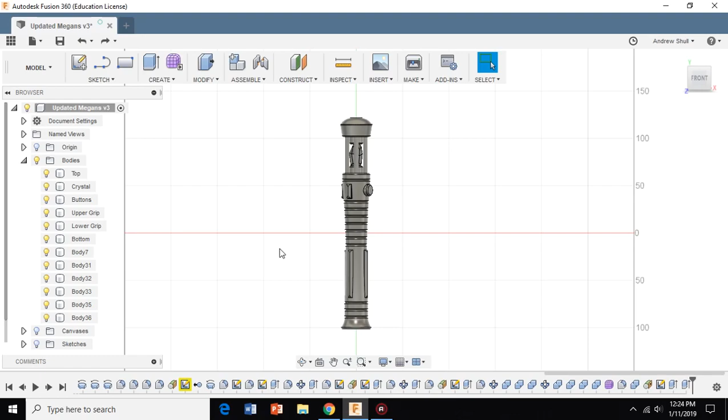Okay guys, so what I want to show you is essentially the final steps towards 3D printing something that you've 3D modeled. This is creating registration parts so that when you 3D print something, for example, I'm working on this lightsaber here.

For those interested, it's a custom lightsaber, just something I drew up out of my imagination, but it's loosely based on a Republic lightsaber just to get the overall silhouette shape, sort of.

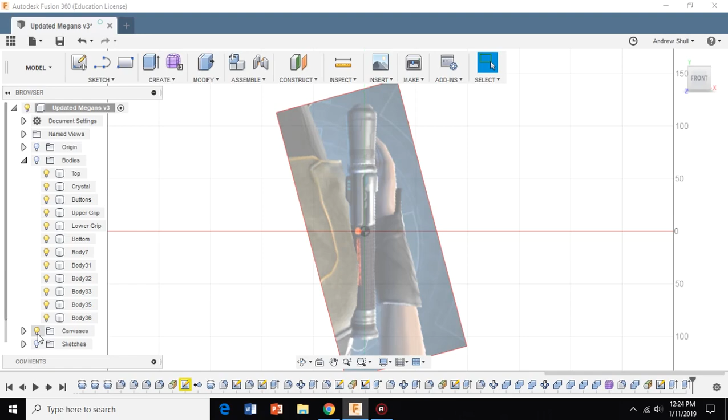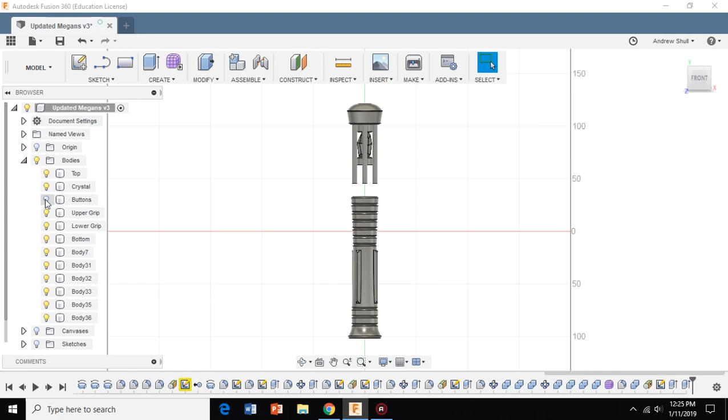Going back to this, now when I 3D print this, my SLA printer isn't nearly big enough for the whole part to be printed at once, so I had to break it up into bits, and I broke it up where it made sense. So I have the top, the crystal - I'm not 100% sure what I'm doing with these - the buttons, the upper grip, the lower grip, and the bottom.

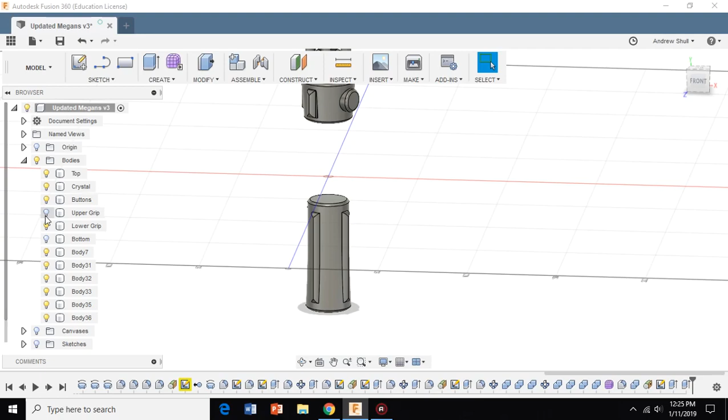Now, I could certainly print these out exactly as is. If we look here, if I print this lower grip out, I could glue it to the part above, this upper grip, no problem, and the overall lining up of that won't really matter.

As long as I get the parts pretty close, I'm sure a lot of you would be all right with that. But I'm really anal about the things that I make, so I want these to have some registration. Not just for this one, because this part isn't as important, but I really want this to line up exactly as I 3D modeled them. I want all my parts lining up exactly the way that I 3D modeled them.

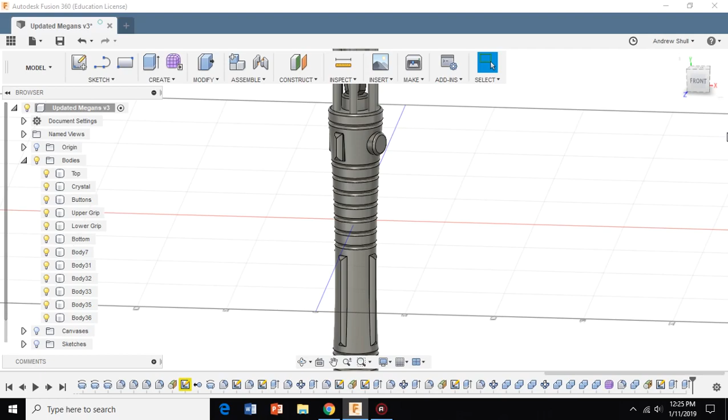In order to do that, I'm going to do registration. You may have actually noticed this on the bottom part here - I've already created this, and this is what I'm going to show you how to do now.

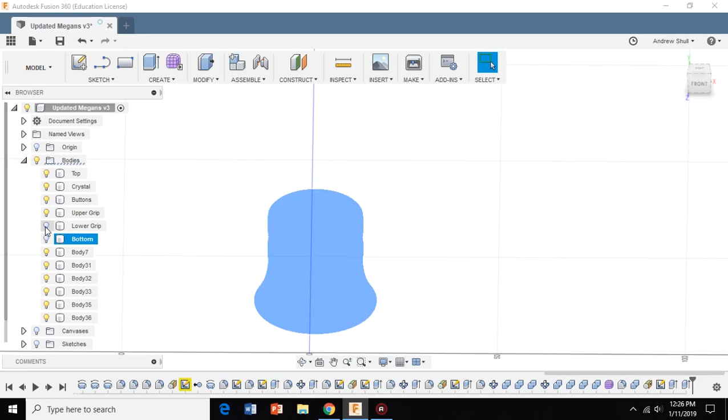So I created a little hexagon key essentially that is part of the bottom part. When I print this, it's going to have this, and it will go nicely into a little hexagon hole in the bottom of the part above it.

So I'm going to show you how to do that now, and it's actually really simple, and it's a really powerful way to essentially make sure that your prints line up when you go back and put them together. It makes your life so much easier, and it actually strengthens that bond too, because you have a little bit more surface area to work with.

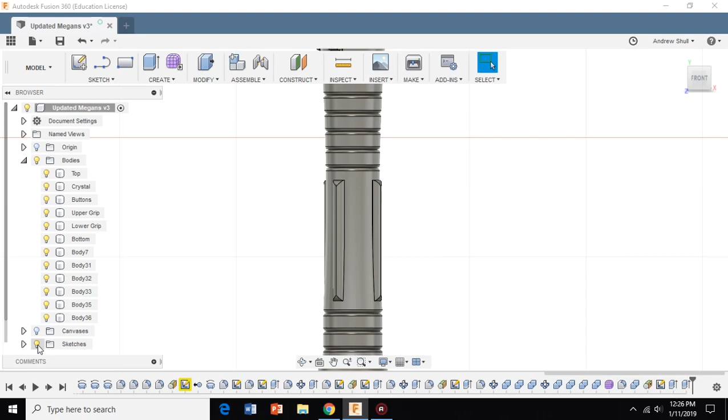So first off, I'm going to bring back my sketches and hide everything that I don't need. So I don't need anything but the lower grip. Okay, so you can actually see my underlying sketch now - hopefully that doesn't get in the way too much, and if so we'll hide it, but there's a reason for that.

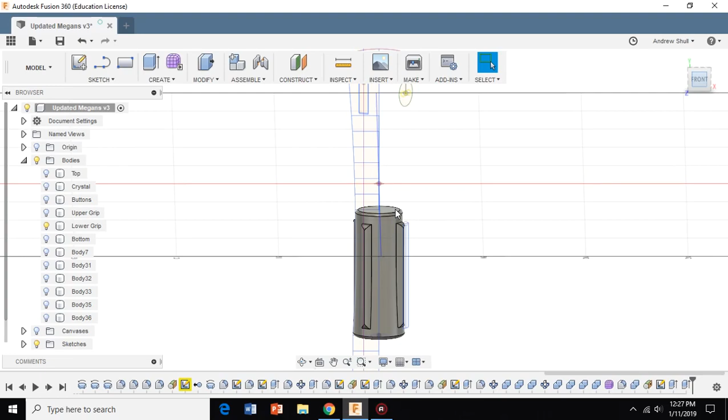So first off, if we work on a sketch, we're going to need to draw a sketch, but sketches need a plane to work off of. And if you look here, this is the origin, so there's no plane where I want it on this face.

So we're going to go to Construct, Plane Tangent to Face at Point. Now, we're going to choose the face, which is the face that I want to work off of here, the top of my lower grip.

And I'm going to choose a point. Now, to be honest, I don't really understand the points - I'm pretty new to this. This is mostly to help me, to be honest, but if it helps you, great.

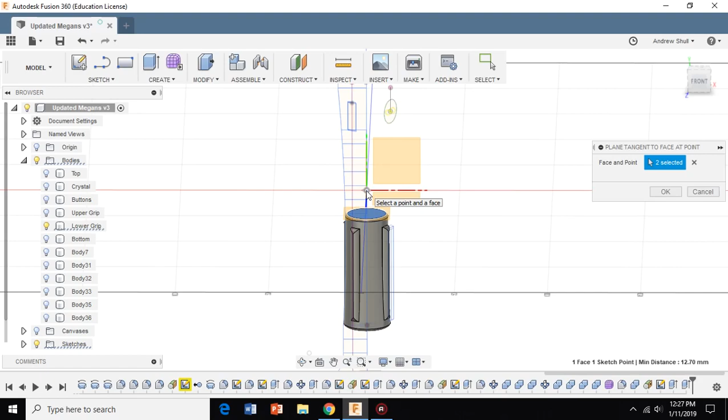And so I just choose the origin, and it works out. I don't know why, so maybe you'll be able to tell us in the comments, but whatever. So I'm going to hit OK. Now I have a plane that's been constructed tangent to the lower grip.

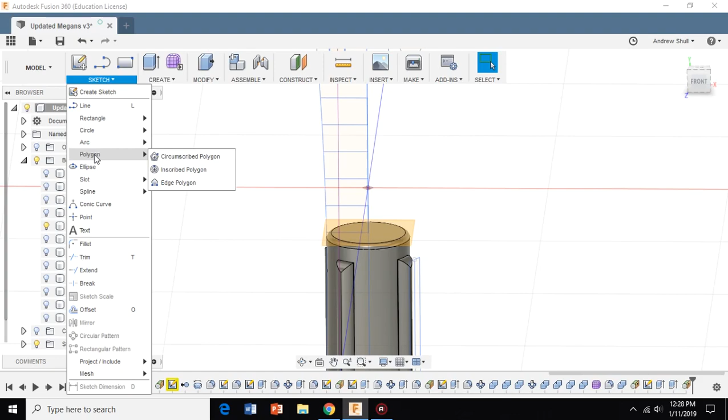And this is where I'm going to create a sketch, and I'm going to do a polygon, an inscribed polygon. Now, I may be over-engineering for some of you. Maybe some of you don't really care about that, you just want the parts to line up well enough up and down. And so in that case, a circle would probably be just fine. But I'm going to do polygons, so the little bits on the side will also line up nicely.

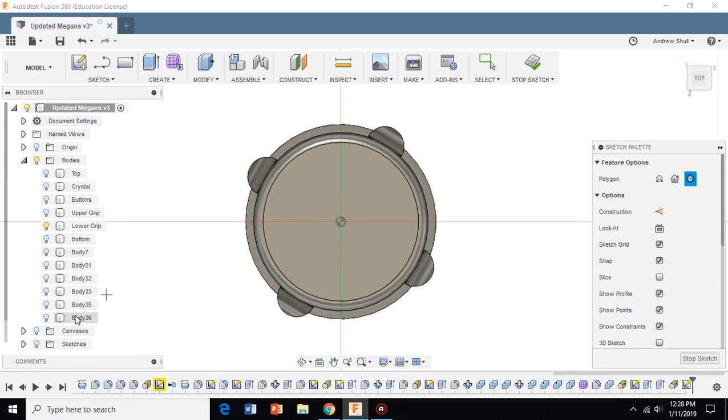So I'm going to do an inscribed polygon. Doesn't really matter. I'm going to choose the plane that we just created. Now you can actually see the previous hexagon I created because my sketches are showing, but that's one of the reasons I have it showing, so that I can see where it was. But it was 4.5 millimeters, and so I'm going to hit that. All right, so now I've constructed this hexagon sketch.

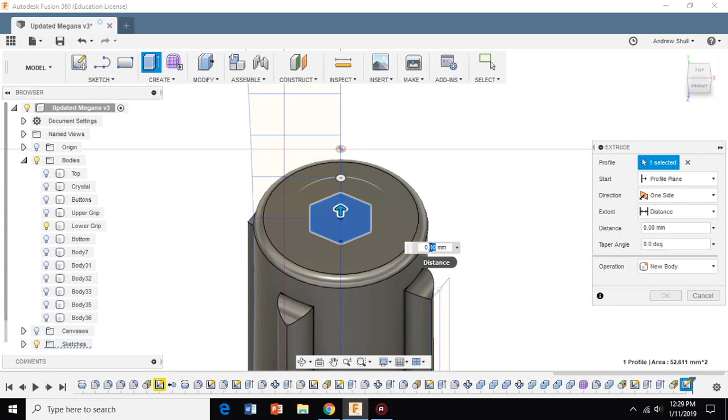So we need to extrude it. So I'm going to go to extrude. You could hit E as well, but I never remember the keystrokes. So we're going to extrude it. My previous one was 3.5 millimeters, so 3.5. And what I want is it to be joined.

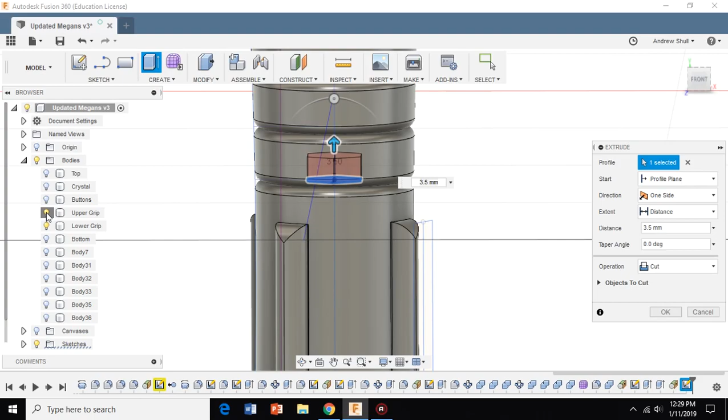So I want it to join with the part below it so that I have this nice hexagon key on top. And I have the upper grip not showing because otherwise you'll have a different operation. Even if you choose join on the other operation, then you'll join the lower to the upper, and we don't want that. We want them separate. So join is good, hit OK.

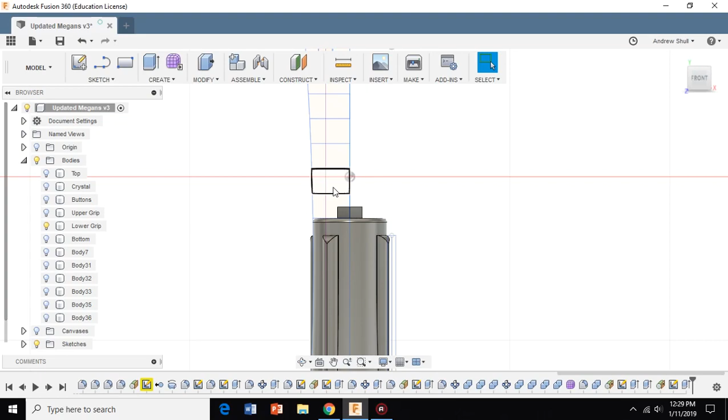All right, now I have this nice lower grip. It's set up, it's done. It has the key on top and the keyhole on the bottom. But we now need to do another step. We need to create the keyhole on this part so that the two parts will fit nicely together. And in order to do that, it's really simple.

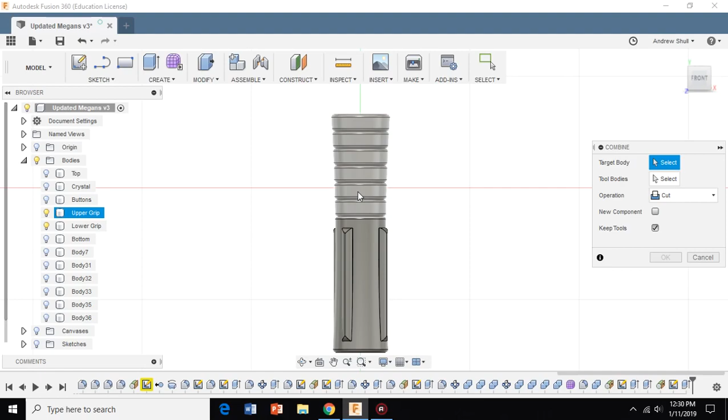I'm going to hide sketches now. I have these two showing that I want to do. I'm going to go to Modify, Combine, hit Combine. So the target body is the part we want to cut the hole into, so I'm going to select that. The tool body is the thing that's doing the cutting, so I'm going to choose that.

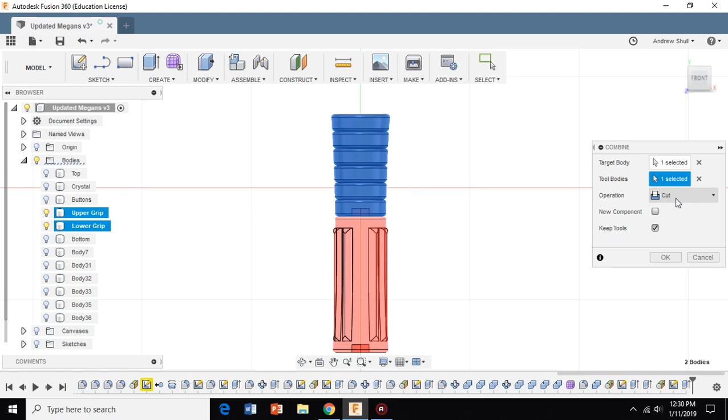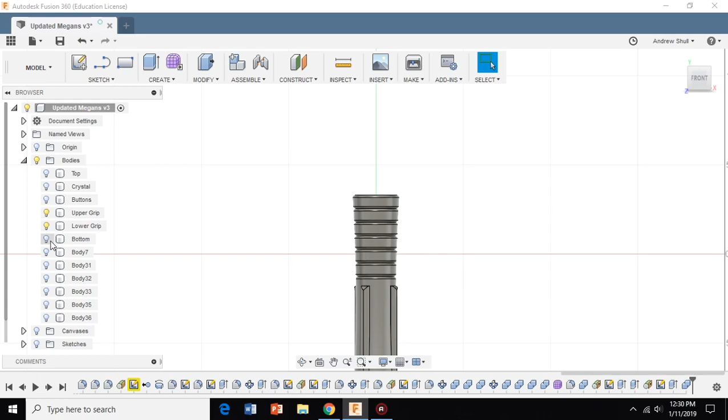Now, a lot of times Keep Tools is not checked. We want to make sure it's checked, because otherwise we'll cut this little keyhole into it, but we'll lose this whole part. And we don't want that, so we want to keep the tool and we want to cut. So we hit OK. All right, now what we have is we still have our nice little male key in our lower grip the way we want, but if we look at the upper grip, it now has a registration hole for this. So, like I said, we're going to do this for all the parts until we can have a nice, easily assembled model.